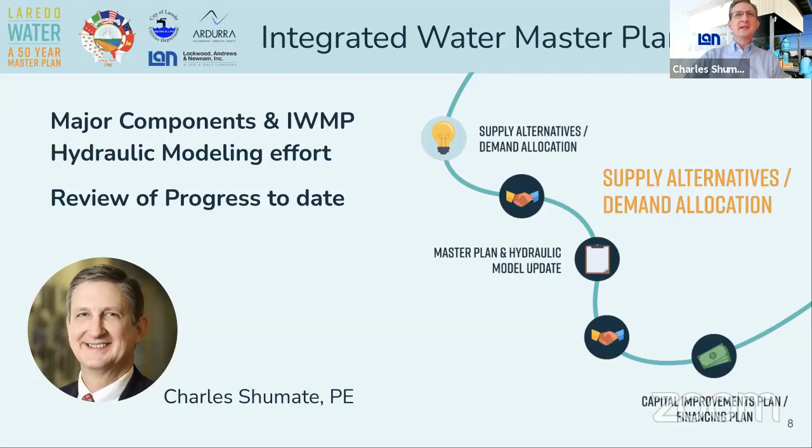The goals of a master plan are really about planning for future growth. It also has some focus on current needs and potential projects, but it's really looking forward over a 50-year planning horizon. Of course, we're always attentive to building on previous work and coordinating our efforts with city staff who know the system and potential projects best.

We want to look at all aspects or facets of the system and supply, identify vulnerabilities, and look at what happens with potential emergencies or outages. Any potential project comes with costs, so we have to look at the financing, how you fund those things, and the potential impacts. We want to end up with a plan that really represents the community and needs of Laredo, and work with the people to address all of those things.

A little bit of background: Laredo has a long history, and the water system starts almost 140 years ago. Almost exclusively, the water used comes from the Rio Grande River. Groundwater or water from wells gets pretty limited use, both due to its limited quantity and quality. Some of the previous effort we're building on is the previous master plan work done in 2011, with a major update in 2015.

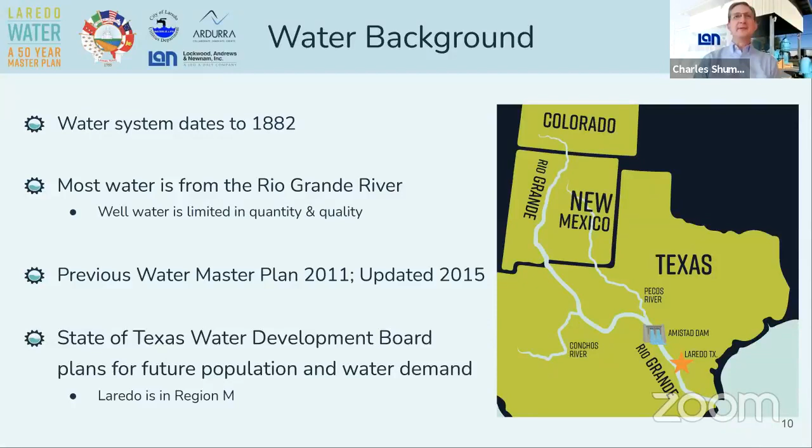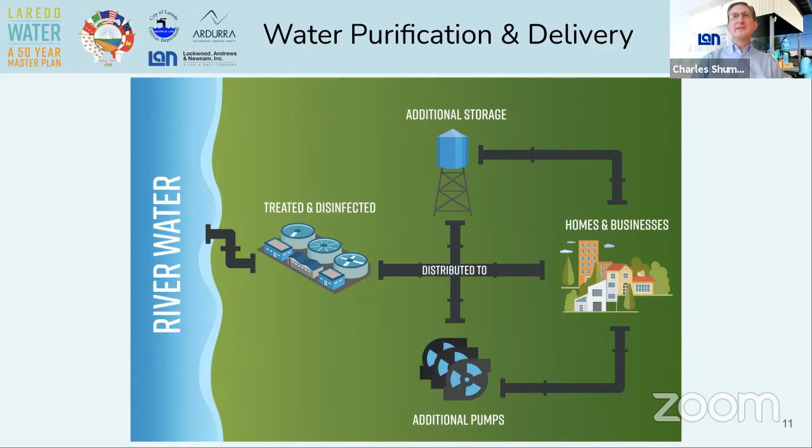At a very high level, here's a simplified view of the primary parts of any water system. You've got your source or supply, either surface water or groundwater. You go through some treatment and disinfection out into the system, where there may be additional pumps or booster pump stations and additional storage out in the system before it arrives at your homes and businesses.

Today in the City of Laredo, these numbers have changed in recent years because of bringing into the system and beginning operation of a second surface water treatment plant. That's the top left aerial photograph, the El Pico treatment plant, placed in service in the last few years. There are currently 8 booster stations, and that number is changing too because with the introduction of additional treatment capacity, the city is able to take out of current service some old booster pump stations and supply those areas directly with treated surface water. There are 9 elevated tanks in the system. Those 2 surface water treatment plants and 8 booster pump stations give you 10 service areas.

Part of the way those service areas are defined is through some pressure reducing valves in the system and isolation valves, just to control boundaries on some of those service areas. And finally, there are more than 1,000 miles of water line in the system, from small 2-inch lines all the way up to large 60-inch transmission mains.

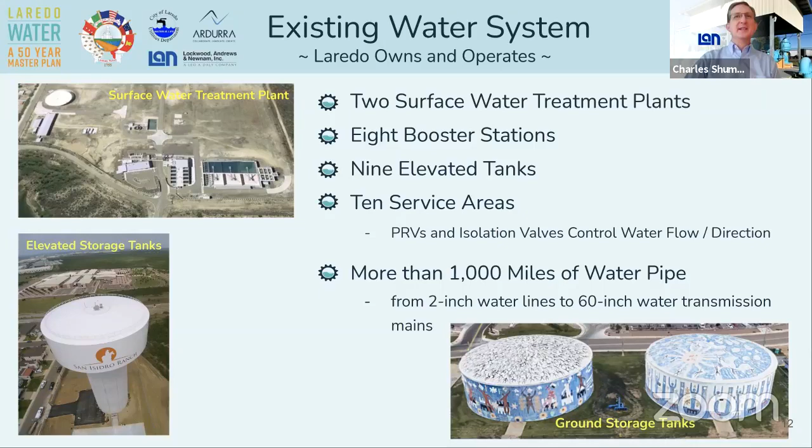So, where I'm most involved in the master planning effort is with the hydraulic modeling aspect of things. A hydraulic model really is a computer simulation or representation of the water system. It incorporates both those things above ground that you see, like storage tanks or pump stations, as well as all that underground piping that you don't see.

It's a tool that allows us to play what-if, looking at different interruptions potentially or disruptions to supply or pumping in the system, as well as to address where those may be short and more may be needed. It allows you to virtually test those improvements, identify multiple alternatives, and compare them based on some priority and way of ranking those things to see which comes out on top.

And of course, cost is always a consideration in those things, but you can look at placing storage at different locations in the system where it may be needed. The model helps you size and determine how much storage may be needed. Same applies to pumps and water lines when you're trying to connect sources of supply to especially growing areas of the system and where there will be new demand in the future.

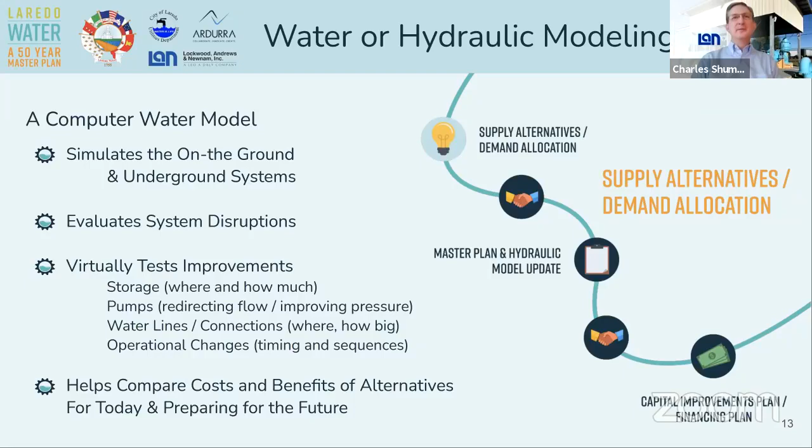And then to test operational changes. Finally, have to address with all those potential improvements, the costs and how those things measure up when you look at their costs and benefits. And it's all about being as prepared as we can be today for what the system needs to be able to deliver in the future.

So a little bit of where we started and where we've been. As I mentioned, where we began work was an update of some work performed in 2015. It's taken some fairly significant updates in some areas just because there's been a lot of growth, so there's a lot of new customers with their demands, a lot of new pipe added to the model. And of course, in that 5 to 6 year period, the cities had to address some pumps and added new pumps or increased pump capacity in a few areas.

A really important step in the modeling process is simply verifying that model, comparing it against SCADA data stored about system operation to make sure that the model results actually match what you see in the system. That looks primarily at large flows in the system from the treatment plants and booster stations, looking at tank levels throughout the system, and then pressures out in the distribution area. A big key to getting those things to match a lot of times is simply pump controls, knowing which pumps are running and when they come on and turn off in response to what other events are happening in the system.

A lot of what we've seen now is you take that verified model and apply it to the existing system first, and then look out at future conditions. And of course, what we see is things that staff talk with us about: growth and challenges in South Laredo with demand, refilling storage that's out in the system. We want to look too at where we may be able to improve efficiency of operation, and at times we're able to find ways of operating that simplify things for the operators and make them more effective across the system that they have to maintain.

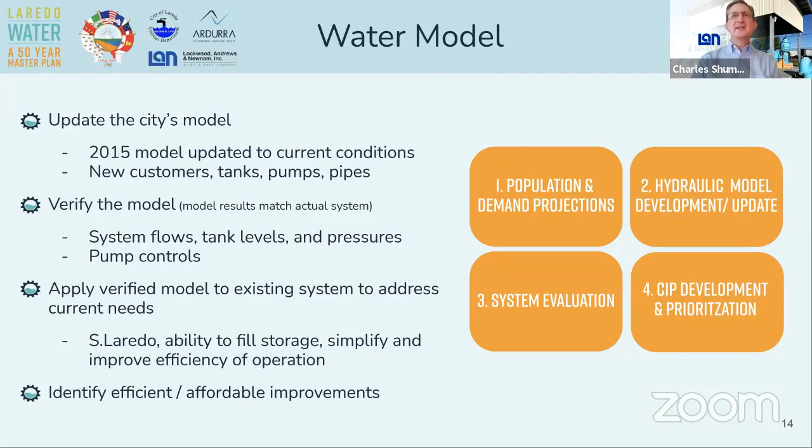So in the end, when we finished our modeling work, that report's going to document the development of that model. It's going to talk about those existing needs in terms of capacity and pressure, and capacity there is a pretty broad term that can be everything from supply capacity to treatment capacity to storage capacity to pump and other conveyance or water line capacity out in the system.

It's going to identify those capital improvements, both short term and long term. So the approach is to look at 10-year increments or intervals over that 50-year planning horizon, and to develop planning level costs for each of those projects, so that the financial planners can look at those numbers. They may have us reprioritize some things, but get those scheduled out in future years for city staff to go and then implement. And then so that plan needs to be dynamic and updatable and actionable. They need to be able to work with the projects described there and go out and implement those.

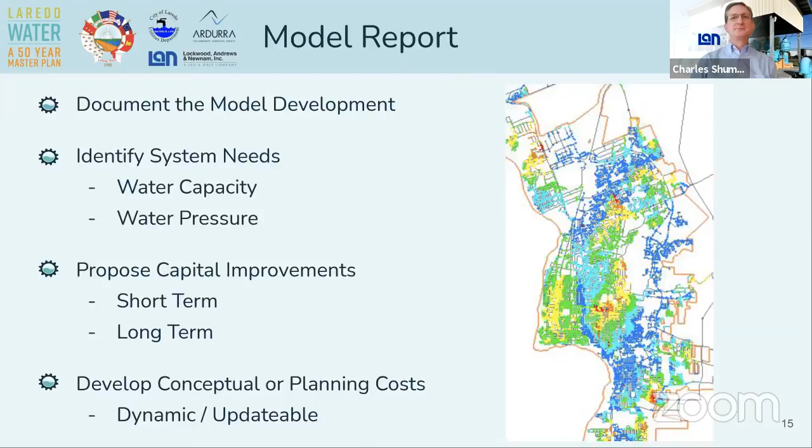A little highlight, some preliminary findings. The big one that stands out is the need, long-term, for what we've referred to as an outer loop. It's an extension of transmission mains that have already...

The early or first segments of them have already been placed and are in service from the El Pico treatment plant. So it continues to extend that El Pico plant supply to other areas of the system, through large transmission lines.

Running around the east side of the city and eventually all the way to South Laredo. Looking at some other water plant improvements potentially that help ensure, increase that level of service or the pressures out in the system.

Starting at the treatment plants and booster pump stations, just making sure there are no obstacles, no impediments to delivering water at the pressure that's needed.

And then pump station improvements, a lot of this in my mind is operational. It's making sure that there are controls in place.

Some of that's physical, some of that may be SCADA and programming, automating some things, to make sure that water is delivered in the quantities necessary at booster pump stations to then send it out to customers in the system. Next slide.

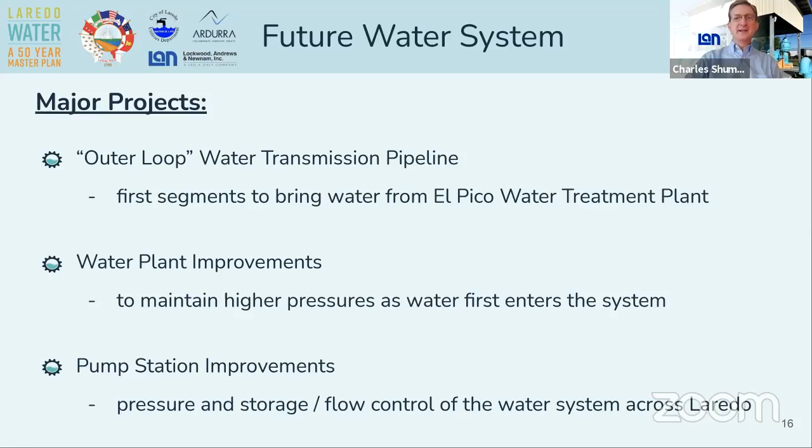This is where I hand it back to Tom, who's going to talk about population, water demands, and a number of supply alternatives that the team is looking at.

All right, Charles, thank you very much. I'm Tom Ray. I appreciate all of you being here. As Arturo said, your attendance is appreciated. Your input is needed, and hopefully we'll be able to answer all your questions later on in this presentation.

I need to start with recognizing an oversight I made in not recognizing Tom Mountz. He is a key part of our team. He's very familiar and has done a number of projects here in the Laredo area.

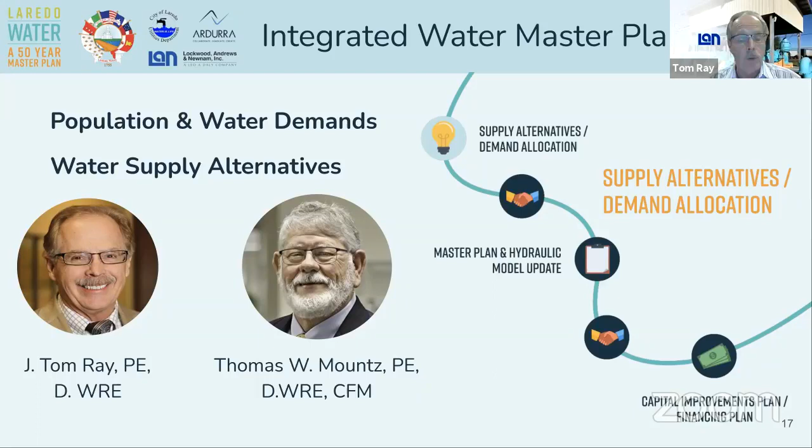Tom is going to help me as we talk through a couple of things: population and water demands, as well as what are the alternatives out there for meeting our future needs in Laredo for water supply.

So, next slide. We have some information that we followed and used in identifying how much water is needed and where it's needed, that type of thing. Key among those is one we've mentioned earlier.

That's the Region M water supply plan. The assistant city manager serves on that planning group and has had significant input.

So the city of Laredo is very well represented on Region M, and the output, the population projections and water demands, are very reliable as a result of that type of input.

We also have a number of water supply sources that have been looked at over the years for Laredo, and so we have those reports, we've looked at those.

The projected water demands we pull out of Region M help us identify two things, and we'll be trying to clarify these later on as well: setting the supplemental water supply goal and the emergency water supply goal.

The supplemental is the amount of additional water supply the city of Laredo will need to meet its future growth, and we'll show in just a minute that Laredo is growing significantly.

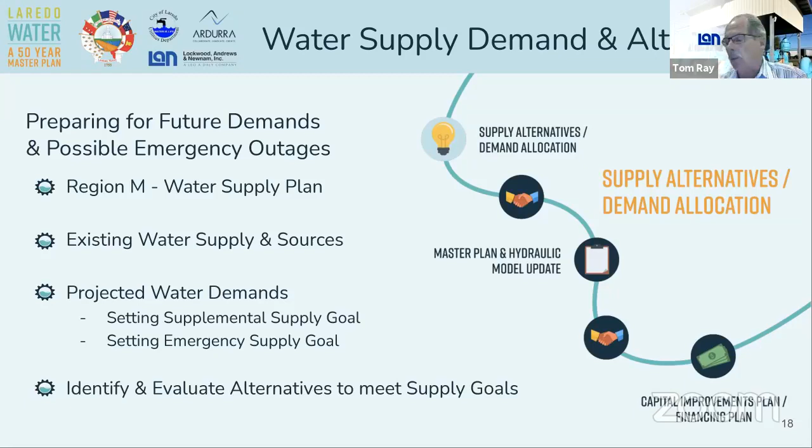We have identified a number of alternatives to help meet both of these supply goals, and we're going to run through those with you right now. Next slide.

Next slide. To show what that growth means in terms of the amount of water supply needed to provide for the growth, that's what is shown on this table.

It's taken out of that Region M plan. It's pretty busy, but I think we can walk through it and kind of show you exactly where we are today.

And where we need to be by the year 2070. Right now, the current water demand for the city of Laredo, that is that top line.

There we go, 42,000 acre feet. Actually, if you add in the Webb County irrigation and the other mining demands, it comes out to 43,851 acre feet per year. And we're gonna explain to you how much water that is.

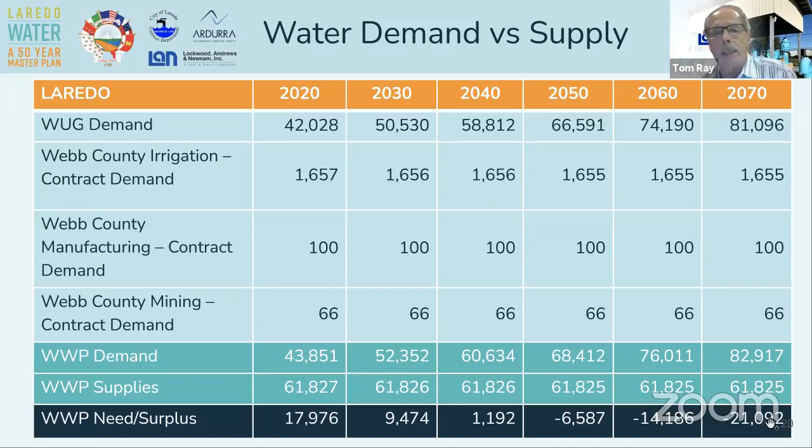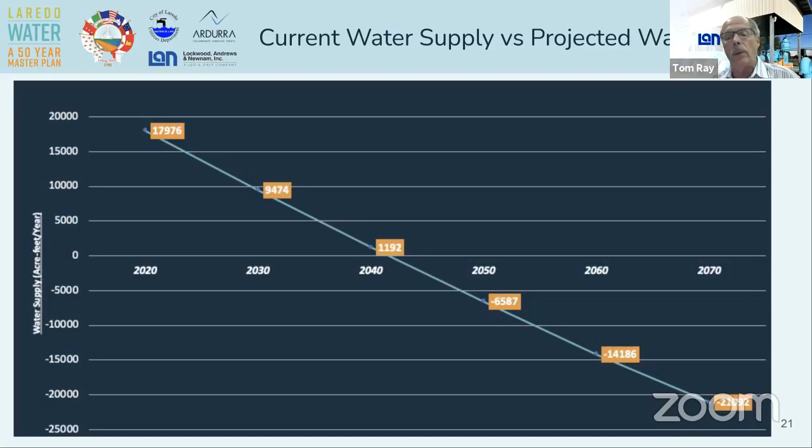Next slide, please. This is a graphic that shows what I'm talking about better than I can talk about it, but it shows where we are today, having the city's surplus amount of 18,000 acre feet. Over time, over the next 20 years, that's going to be used by the growth in the city. And just after the year 2040, we reach zero. At that point, the city will need to have online supplemental supplies to last out to 2070. That's another 20,000 to 21,000 acre feet.

Again, just to emphasize the two supply goals that we're looking at: the emergency water supply goal in case of an interruption of the Rio Grande supply, and the supplemental supply goal that we just looked at on that graph, that 22,000 acre feet that's needed to meet future demands all the way out to the year 2070.

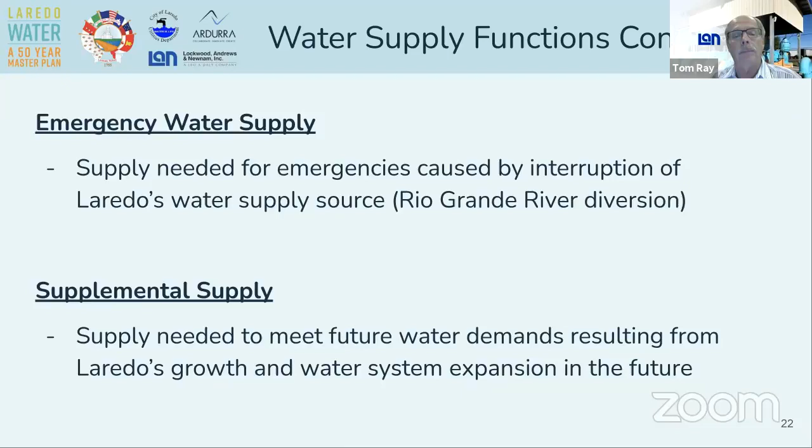All right, you've probably been confused enough about what an acre foot looks like or what it is, but this slide that Gene and his team put together is excellent. Over here on the right, it shows you that 1 acre foot of water is 326,000 gallons. So it's a large amount of water, 1 foot over 1 acre of area. So the current supply, again, that's 61,800 of those acre feet that's available today, that's going to last the city out to 2040 based on Region M projections.

So Laredo is preparing for and has prepared for future growth. And now this water master plan is going to look at water supplies, not only for the long-term future, but also for any sort of emergency outage that could happen on the Rio Grande. All right, next slide, please.

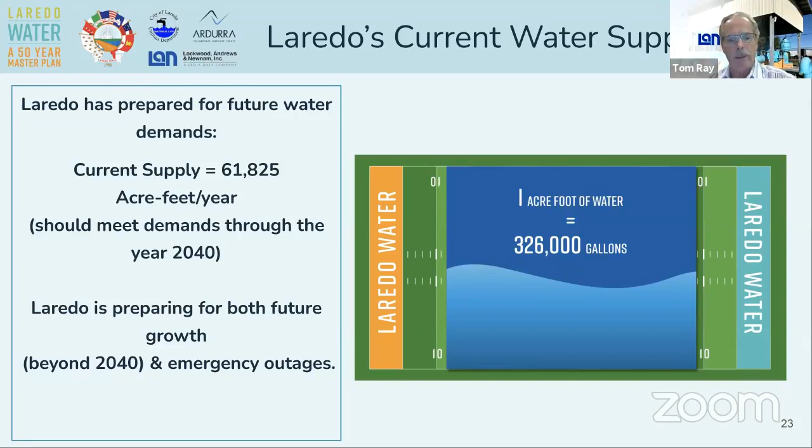Again, this is showing our targets and actually putting numbers on those, because in a few minutes we'll look at the different alternatives. The test will be: will that water supply alternative meet, 1, the supplemental water supply goal, and 2, the emergency water supply goal. The supplemental, again, is 22,000 acre feet. If we take that to another unit, million gallons per day, that's used by city utilities and others when we talk about capacity of treatment and the need for treatment supply. It's usually referred to in million gallons per day. So 22,000 acre feet is 20 million gallons a day.

The emergency water supply amount that we have identified, and we're going to verify this further with the city, with Arturo and his staff, is 37,500 acre feet, and that's 33.5 MGD to have available, again, if there's an emergency, an outage of the Rio Grande supply.

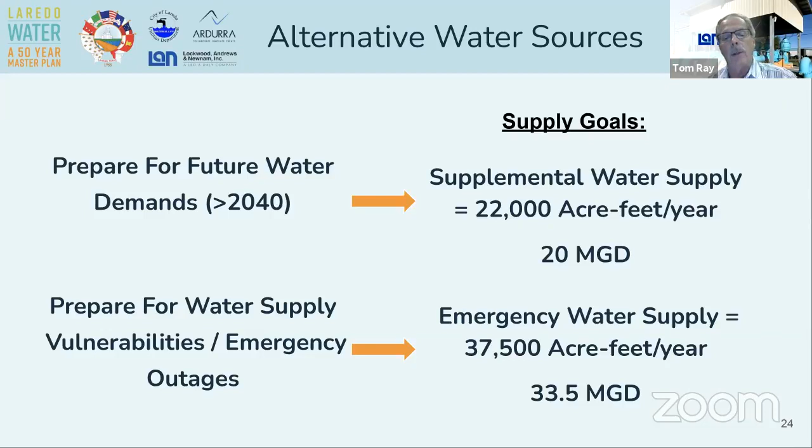Another technique of stretching water supply, if you will, is to use aquifer storage and recovery, and I'll talk about that, try to explain that a little more. And the backbone of the Laredo water system continues to be the Rio Grande. So there continues to be the need to identify additional water rights that could be obtained from the Rio Grande. Next slide.

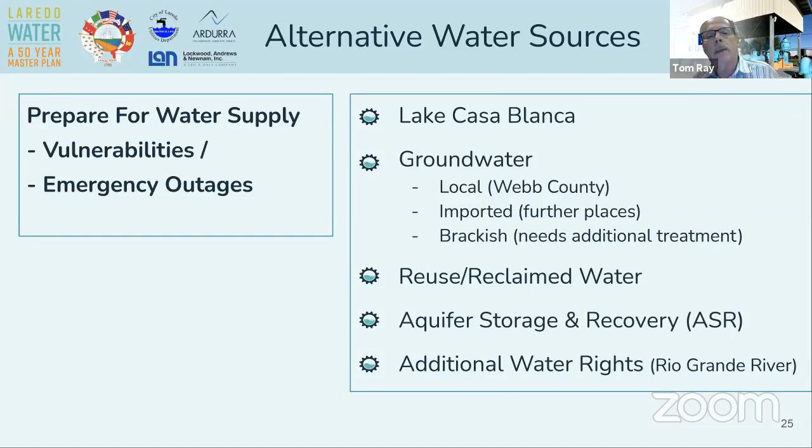All right, this is where I would like Tom to jump in here. Tom has done a lot of work on Lake Casa Blanca, and he can go through the use of Lake Casa Blanca to potentially meet these supply needs. Tom? Thank you, Tom. It's good to be here this evening.

I want to talk just a few minutes about Lake Casa Blanca and the potential for its use for supplemental and emergency supply. It's always been looked at as a body of water immediately adjacent to the city, and so it has always been considered a potential source for additional water.

With this study for the master plan, we re-looked at previous attempts to quantify the lake, and we prepared a memo about the capacities. It could be used, as has been thought over the years, for direct emergency supply. We found that though to be very, very limited. It also has some potential for limited indirect reuse storage.

When Tom comes back and talks about reuse in a few minutes, some of that could be temporarily stored in the lake. There seems to be some capacity for that.

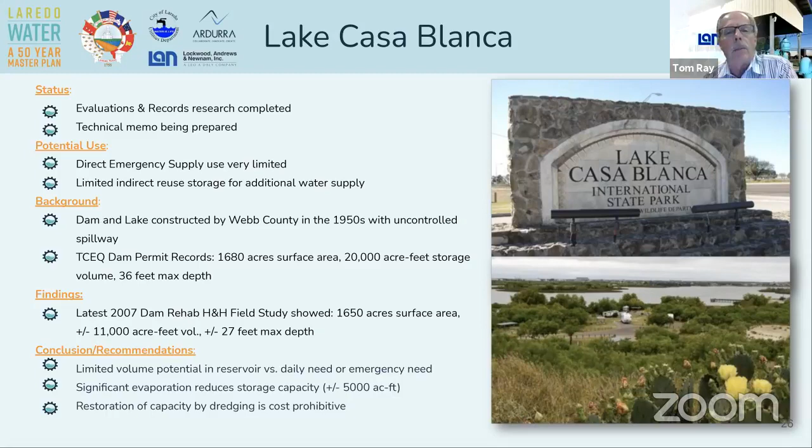All right, let's see. We may have a couple more slides on Lake Casa Blanca. Yeah, this. Oh, okay, no. Here we go. No, I take that back.

We've gone through the Casa Blanca slides and are now going to look at one of the groundwater supply alternatives, and that's in North Webb County.

Initially, we have completed some initial evaluations. We put together a draft document. We'll be going over that with the city.

This supply source is generally in the northern Webb County area, up close to Dimmit County. The distance from Laredo is about 40 miles. As the crow flies, it would probably take about 47 miles of conveyance pipeline.

Supplies are being estimated, and on the phone with us, joining us, is Mike Thornhill. Mike is our consultant with regard to groundwater. He's a groundwater hydrologist with the Thornhill Group. I've worked with Mike for years, and he's very familiar with these groundwater sources.

He has provided us information regarding what the potential supply from this North Webb County area could be, and it looks like about 25,000 acre feet per year. That does meet the supplemental supply goal. That's just over 22 million gallons a day.

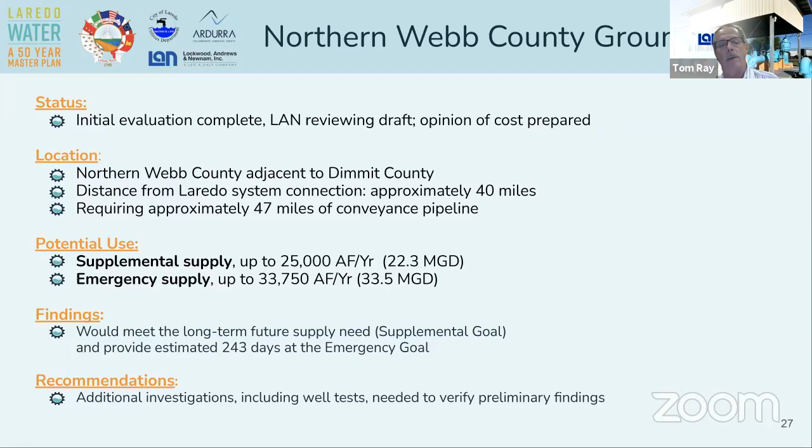Brackish groundwater is another one. Again, Mike Thornhill helped us with this one. There have been a number of zones identified by the Texas Water Development Board and others of brackish supplies in Webb County. The distance varies, the cost is high, and the water quality is

slightly saline to moderately saline. Treatment would be required. The value of this brackish supply is that it's in close proximity to the city's water system. However, the downside is it doesn't meet the goals—it's limited in quality and has limited quantity as well. So it's not sufficient to meet either of the goals.

All right. Mike, did you have anything to say on either one of those? I don't want to.

Again, I apologize, I'm still out in Wink, and I'm not much to look at anyway, so I'll just leave the camera off. But with the northern Webb County Carrizo, the preliminary indications are that it's pretty good quality, but the TDS is in the 800 plus range. There's more Carrizo below it that would be probably slightly above 1,000, so there could be some strategies there for blending, in terms of the longer term.

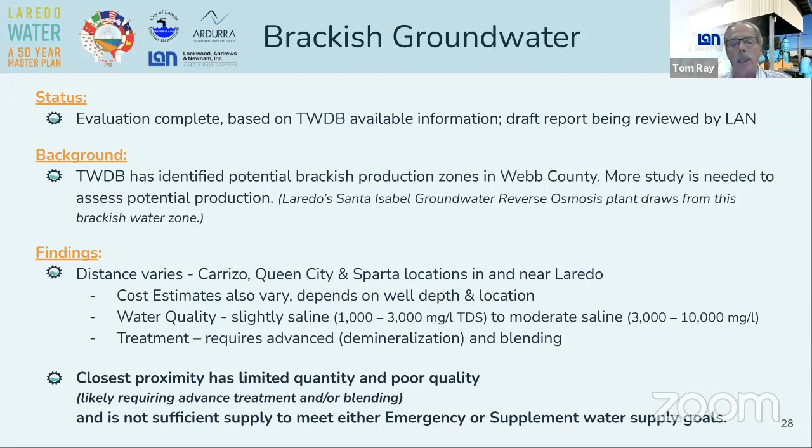All right, let's move on to the next slide.

Another report was done that we relied on, a very thorough report looking at what is called ASR, Aquifer Storage and Recovery. This technique has been used, came into vogue probably 30 or more years ago, but where it's applicable, where you can do it, it allows you to take a portion of your treated water from your water treatment plant and store it essentially in an underground aquifer. Then during the heavy use times of the year, typically summertime, you could pull it out of that underground storage and use it during those periods of time.

What was found by the technical report in 1996 was that the aquifers in the city area are shallow, and importantly, when you inject the treated water, the recovery rates provide low production. So you get into a situation where it's going to be more costly than the production that's made available from the storage. Also importantly, the Region M group took a look, but there are no recommendations in the current Region M plan for aquifer storage and recovery.

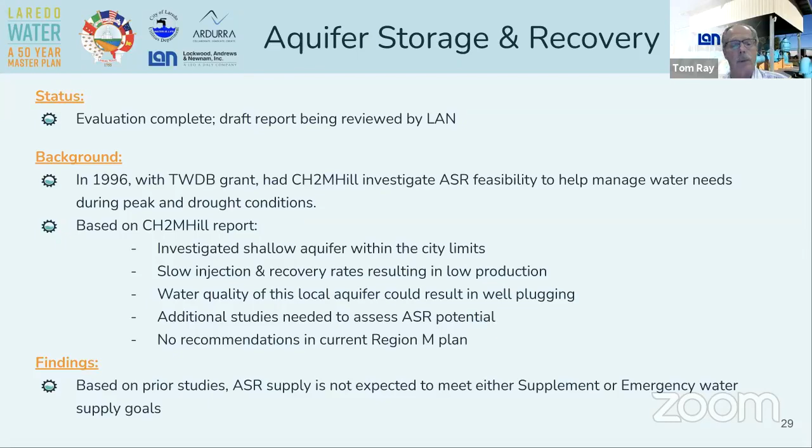All right, next slide, please.

Mike can help me with this one too, because we're going to talk about imported groundwater. These are supplies that are outside of the Webb County area, moving up into Dimmit County, all the way up to Val Verde and Kinney County. Here's an excellent map that Mike and his group put together to show where these supplies are located.

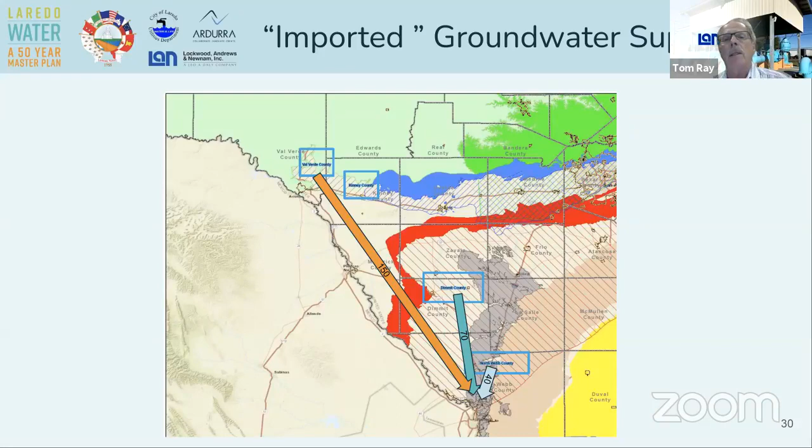Keeping that map in mind, if we look at Dimmit County, adjacent to Webb County, it has a significant supply source, 40 million gallons a day. It's 70 miles from the city system, the water quality is good, and no blending would be required.

If you move a significant distance, doubling it to the Kinney County area, there's about 22 million gallons a day of fresh groundwater available, but it's also adjacent to Val Verde County. Mike Thornhill is advising that if you look at Kinney County, you'd want to look at Val Verde in conjunction with that, combine those, and you have a very significant supply, because the Val Verde groundwater supply is 40 to 90 million gallons a day on its own. The downside is that's 150 miles away, but it is fresh groundwater, no blending would be required.

Mike, any comments on imported groundwater? Any points I missed? Certainly any issues with groundwater conservation districts would need to be addressed, and the joint planning process of what are called groundwater management areas would need to be addressed in terms of availability of water.

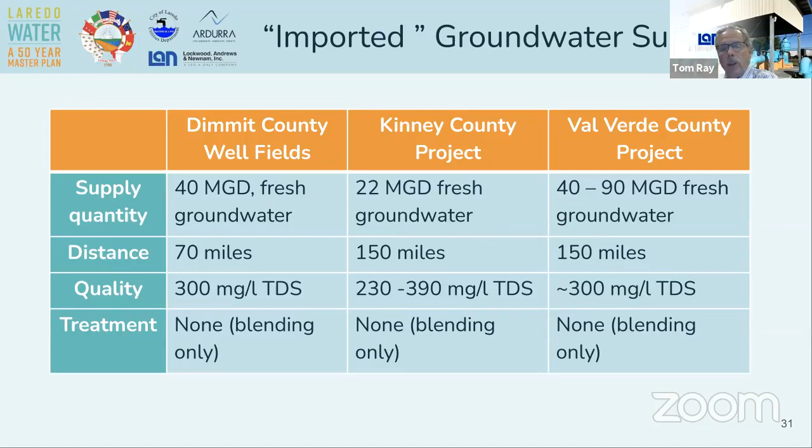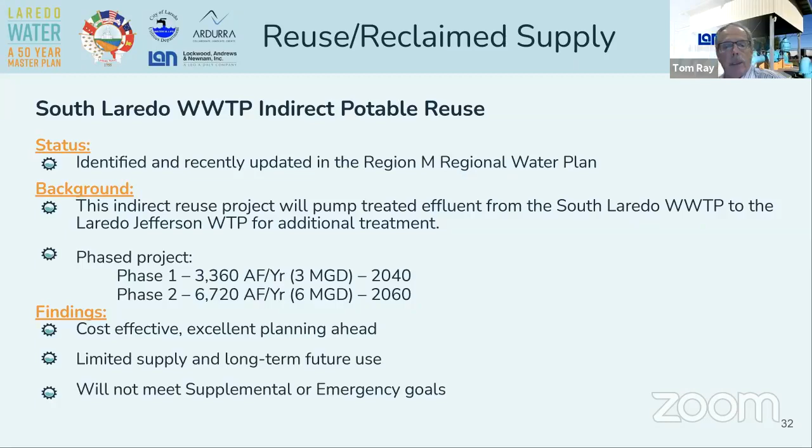We also had Kirk Kennedy, who's very familiar with the Rio Grande, look at additional water supply, surface water from water rights that could be made available in the Rio Grande. Kirk Kennedy did not find any additional surface water supplies that would be readily available on the Rio Grande in terms of tributaries or that type of thing.

So based on our initial discussions, and this will be in the report, additional surface water development in the Rio Grande is expected to be limited, but the acquisition of future water rights is a recommendation that the city is currently following and should continue to follow.

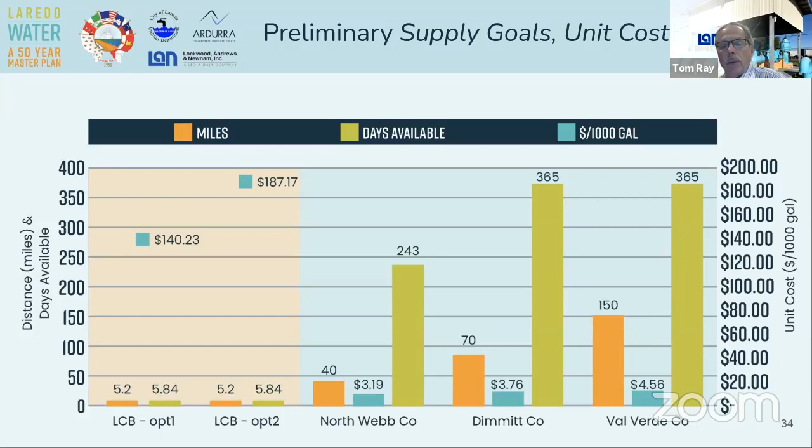Looking at the groundwater projects we just went through, the first bars are the distance from the city system. The next bar gives an indication of what it would cost to use supplies from that source at the 33.5 MGD goal. You see those cost numbers fairly consistent for Wave and Dimmit County. Val Verde County, you go out 150 miles, so you add some significant cost. One other factor the city would be considering is that North Webb County could provide the emergency supply goal for 243 days, as mentioned earlier, but the Dimmitt and Val Verde County projects would be year-round able to provide the emergency supply goal for the city.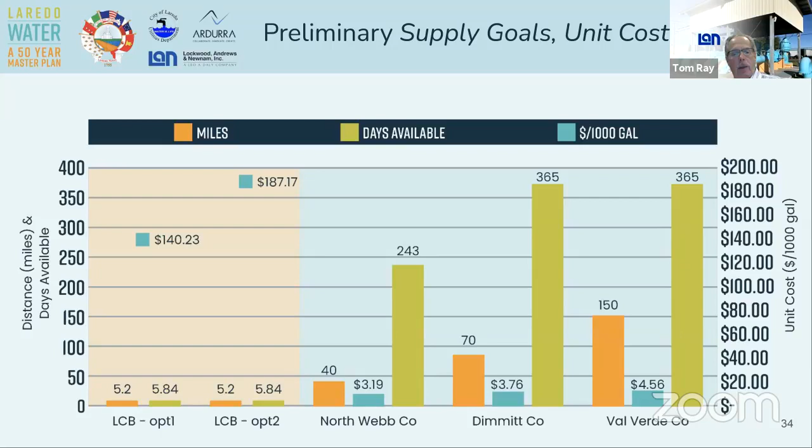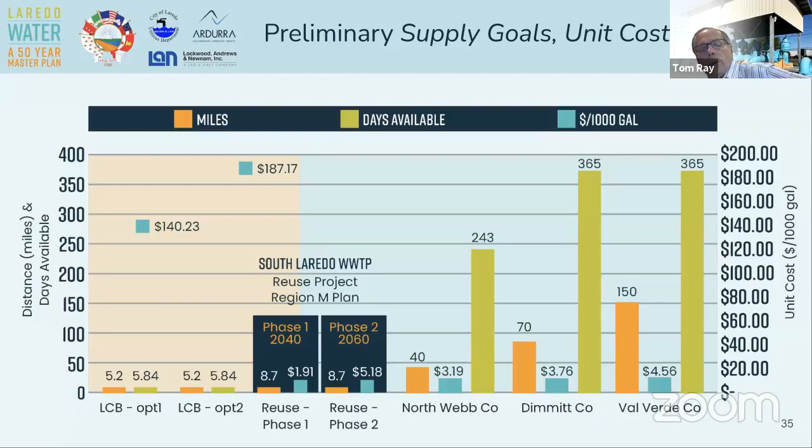Next slide. This slide is the same, except I've inserted the South Laredo reuse project, to give you an idea of the phase 1 cost. It's close to the system — that's the 8.7 miles of piping that would be needed. But the cost, particularly that first phase cost, is very low at just under $2 a thousand. Then the phase 2 cost is just over $5 a thousand.

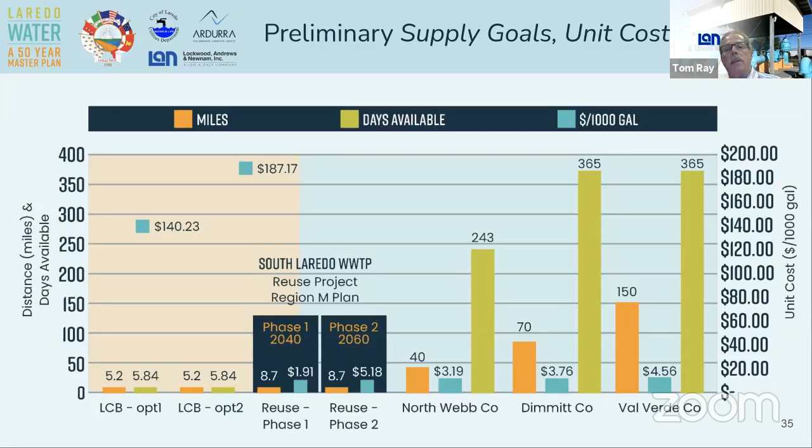So that gives you a perspective of supply amount, the ability to meet the emergency goal in terms of number of days, and then an estimate of unit cost for doing that. Those will be discussed in more detail in the report that will be provided to the city.

We'll be working with the city probably next week, going through these and confirming that the weighting factors and the outcomes of the criteria rankings are good, reliable, sound, and reasonable. Again, this will help us identify for the city the alternatives that make the most sense in terms of meeting both the supplemental water supply goal and the emergency supply goal.

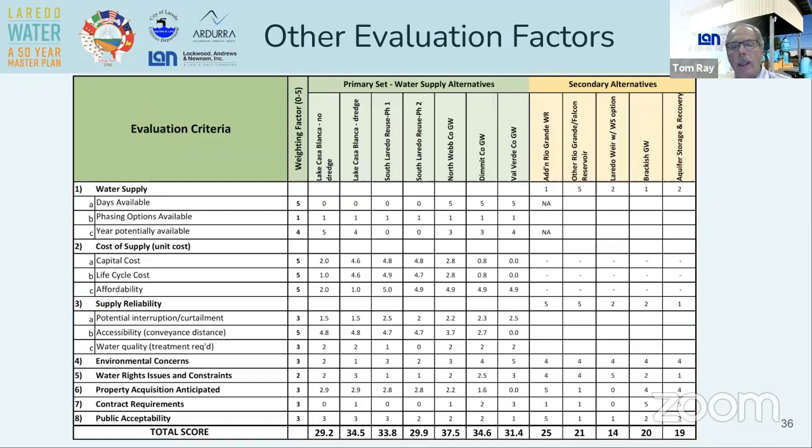Great, thank you Tom and everyone for sharing all that great and detailed information about the City of Laredo system and what we're looking at for the future. Again, the Laredo Utility Department has been developing and implementing projects for many, many years, replacing old infrastructure and bringing water and wastewater service to new development.

The next part of the project we're working on now is prioritizing and scheduling all of these projects, to sort through the projects that are already known, to look at new projects that are being anticipated, to imagine future needs using that water model, and also looking at future water supply sources and emergency sources.

I'll be assigning a deadline and a cost for every project, judging the impacts and the benefits of the projects against the costs, so that we can pick the best projects for the best price and lay out a plan for the next 20 years.

That's really important because we want to be able to pursue all of the financing options we have—loans, grants, and partnerships. We want to keep improving the system today and prepare for the system we'll need as we grow. Next slide, please.

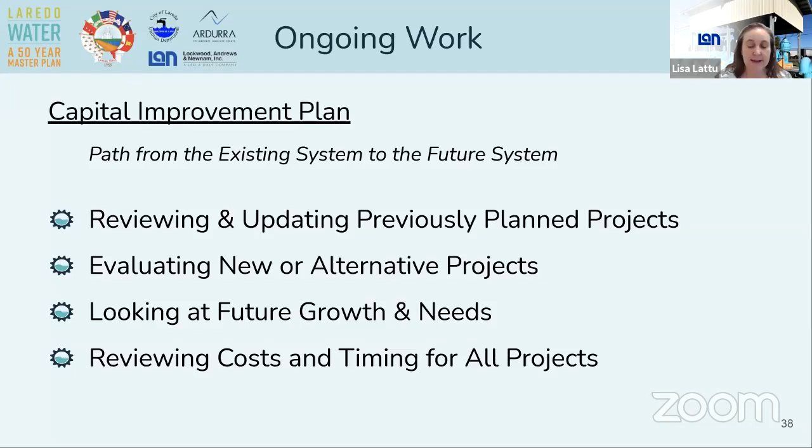The next slide shows a little bit of the dollars we're looking at already, and this is just 5 years' worth of projects that are already planned—almost $126 million of total investment, split about $69 million for supply and treatment of the water, and $57 million for moving it around from place to place within the city.

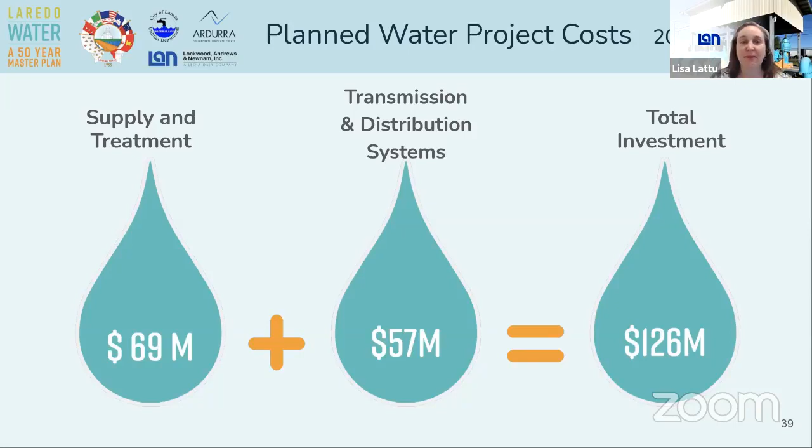The next slide shows some of the projects that we already know about or are thinking about, and hopefully there's one that you recognize from your neighborhood. Of course, the El Pico treatment plant, the Lyon Street booster station, which I think maybe has started work already, some repair and replacement lines particularly downtown, and the project that Charles was talking about—an outer loop project to help bring water around the city to some of the new development.

And then a lot of the local or neighborhood plants always need work—so Cuatro Vientos, Northwest, I think the water tower there is called La Bota, in the East Corridor area, the Del Mar area, and the airport area. Those are some of the ones that we have identified already.

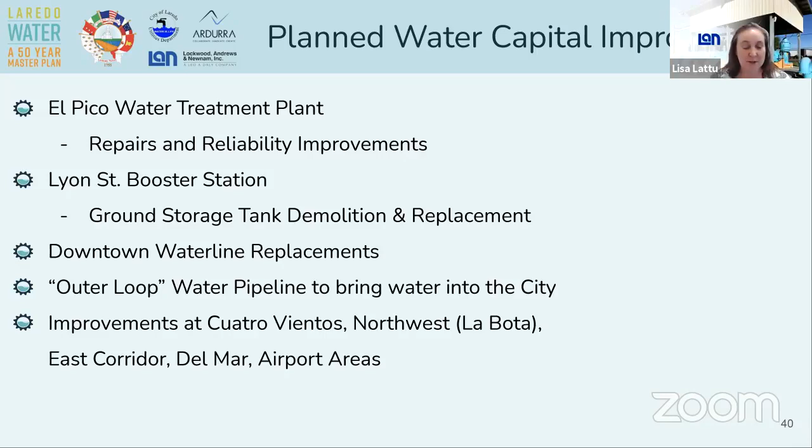Thanks, Lisa. About this time, at a real town hall, a live one, we would stretch our legs and take a potty break. This being the Super Bowl, we'd have some great commercials for you. But what we're going to do now is just roll right into the wastewater side.

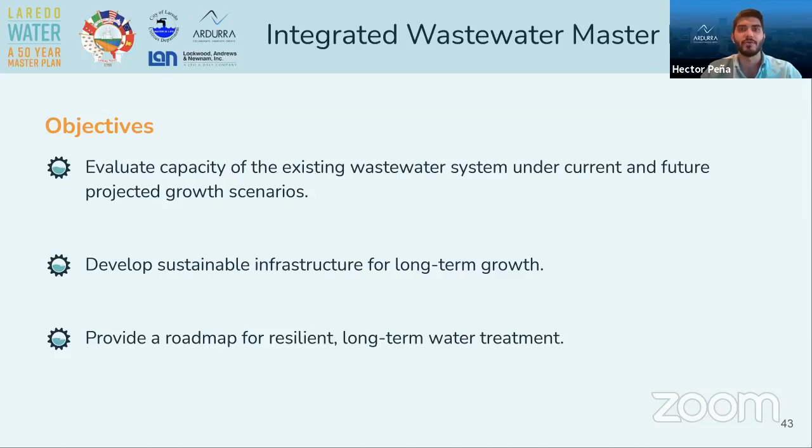So just as a background of the wastewater collection process, here's a graphic that shows what happens after homes and businesses flush. The water exits homes and businesses from the drains and toilets, and where that goes. If you look at the middle of the screen, you've got homes and businesses shown here, and then the wastewater collection system represented here with the green pipes.

The collection system consists of gravity and force main pipes, manholes, and lift stations, which are represented here by those pumps labeled as lift station. Then the collection system sends the dirty water into the wastewater treatment plants to be treated, and after treatment, the water can be either safely released back into the river, or as shown here with the purple pipe, it can be reused as non-potable water.

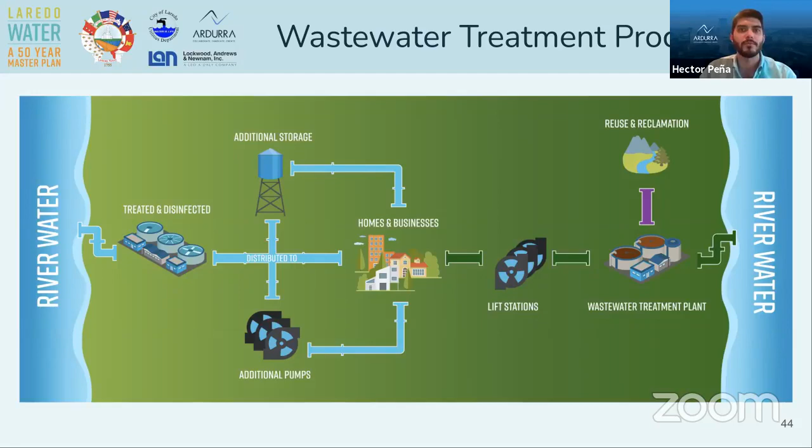So, next slide. On the right side of the screen, we have a map showing the city's actual wastewater system. The city's collection system is made up of approximately 900 miles of sewer lines. Most of these sewer lines are gravity lines, but there are also some force mains.

So the gravity lines are shown here in green. There's also force mains, also shown, but it's a bit harder to see because there are significantly fewer force mains, but they're shown here in red.

And to help visualize the amount of pipe, if the map doesn't do that already with all these green lines, if we were to line up the 900 miles of pipes that make up the collection system, it would be equivalent to the distance from Laredo to Kansas City, Missouri. Just throwing that fact out there to put in perspective how complex the system is and how much pipe the city constantly maintains that we may not be aware of in order to keep the system functioning.

So this 900 miles of pipe ranges in sizes all the way from 4 inches to 54 inches. Again, they collect the wastewater from every single home and business in the city. Then the wastewater travels mostly downhill by gravity until, as shown in this graphic, it reaches a low point in the system where a lift station has to be installed in order to pump or lift the wastewater so that it can continue flowing downhill, so it can make its way into one of the wastewater treatment plants.

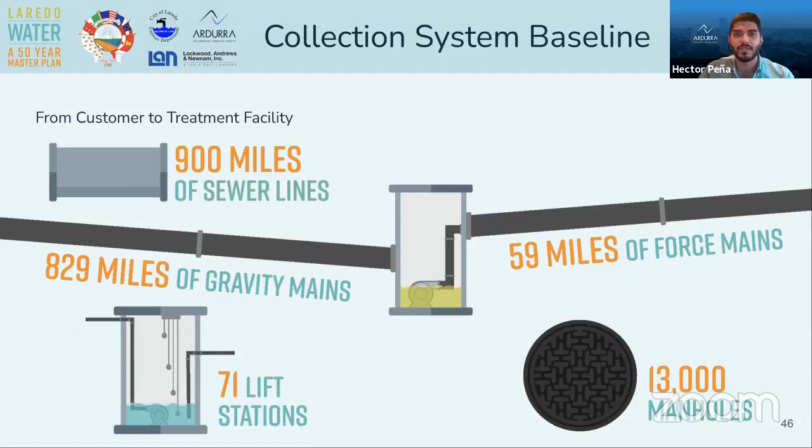And finally, there are 6 wastewater treatment plants that the city owns and operates. If we went a couple of slides back, we looked at the map on the right, we'll see that they're right there, circled in blue.

So that's... I'm sorry, my screen turned black here, so I can't see anything. All right, I'm back. Sorry about that. Technical issues here, but anyways,

Again, those are the 6 wastewater treatment plants, and combined, these 6 water treatment plants have a capacity of 35 MGD, or 35 million gallons per day, but they actually treat an average daily flow of 19 MGD.

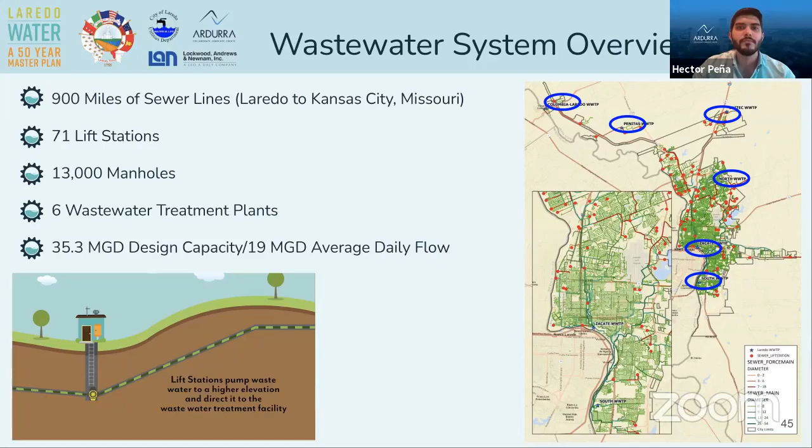So here we have a graphic that shows a typical treatment process that the city uses in most of their plants. The first component here on the left side is the influent lift station. This is where the wastewater from the collection system that I just described enters the plant and discharges into this wet well or tank that sits below ground.

From there, wastewater is pumped into the first process, which is called pre-treatment. That consists of the screening and the grit removal, shown here as the second and third processes on this graphic. Screens are there to capture and remove large objects such as wipes and plastics, and the grit removal is there to remove finer materials such as sand and gravel. So all of these solids, both the larger objects and the finer material, are removed and taken to a landfill for disposal.

So the next step in the process, shown here in green, is called the secondary or biological treatment, labeled as the aeration basin. Here, activated sludge, which are the good microorganisms, are introduced, as well as air, as you can see on the graphic here. We can see some bubbles there.

So air in the form of bubbles is pumped into it as well to feed these microorganisms, to help them reproduce, keep them alive, and eat the pollutants in order to achieve biodegradation.

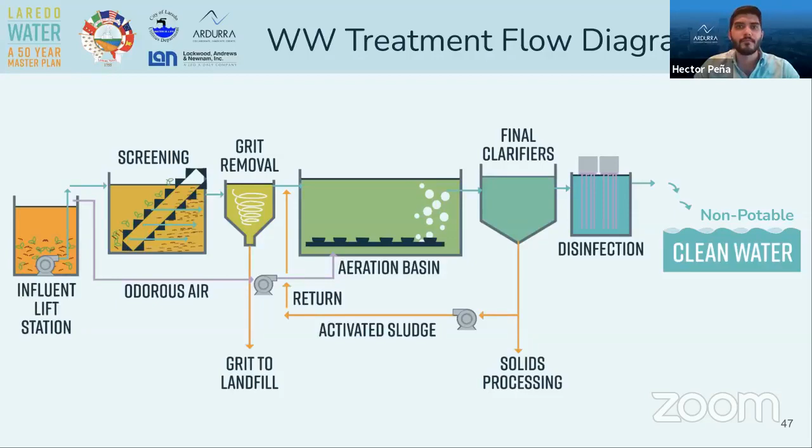So here we have aerial images of the 6 wastewater treatment plants that the city owns and operates. On the top left, we've got Zacate, which is by the International Bridge number 2. To the right, we've got South Laredo, which is behind the Santa Fe subdivision, over by Zapata Highway. And then we've got North Laredo on the right side, which is in Shiloh, close to Loop 20.

Bottom left, we've got Unitec, which is at mile marker 13, serving an industrial area. Then we've got Laredo Colombia, which also serves an industrial area by the Laredo Colombia International Bridge. And finally, on the bottom right, we've got Peñitas, which is also located on Mines Road.

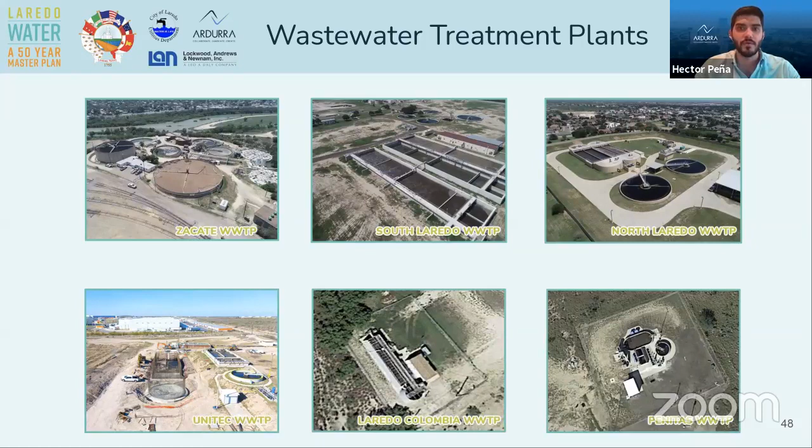All right, so earlier I talked about the combined design capacities and average flows for the 6 wastewater treatment plants. Here we have the 50-year projections to determine what capacity is going to be needed by 2070, which is a long-term scenario. On the left side of the graph for 2020, we have the current approximate population shown in blue, which is around 300,000 currently.

And then, as mentioned earlier, the average daily flow, shown here in the yellow or green color, is around 19 MGD. And then the combined capacity of 35 MGD for the 6 plants.

Then on the right side, we have long-term projections. And as LAN said earlier in their presentation, the population for the city of Laredo is estimated to be over 600,000 by 2070. So as the population increases, the wastewater that's generated will also increase, right? So it's estimated that the average daily flow into the wastewater treatment plants is going to be around 46 MGD.

So in order to figure out what the treatment capacity would be required by 2070, we look at the TCEQ rules, which state that whenever a wastewater treatment plant reaches 75% capacity for 3 straight months, then you start planning for expansion. Following that rule, we determined that we're going to need approximately 61 MGD of treatment capacity to treat those additional 26 MGD in 2070.

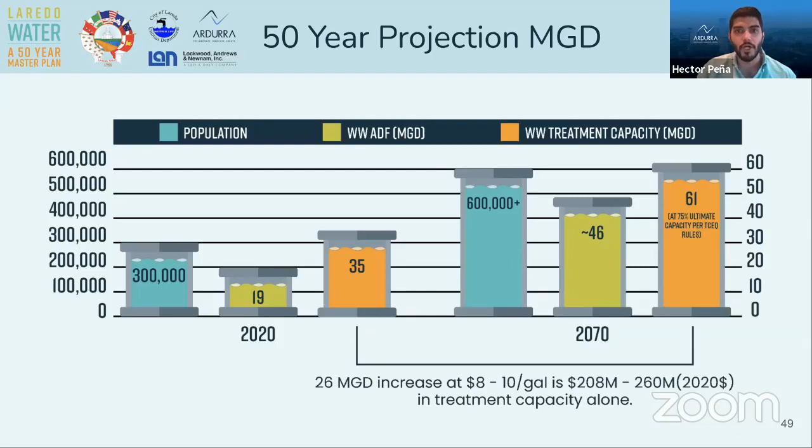Again, these are just rough numbers. We're early on in our study here for our wastewater master plan, but we'll just provide an idea of what the cost may be.

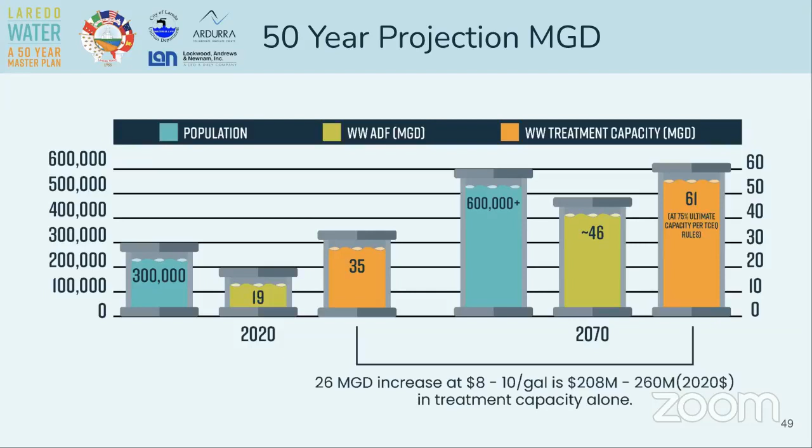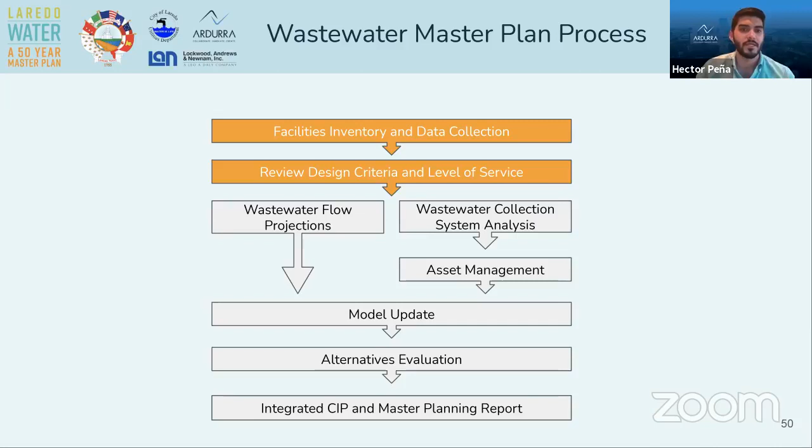Below those steps highlighted here in orange, we have a couple of steps here in parallel, which is where we currently are in the process. And Nacho Hinojosa from our Laredo office here will touch on that, as well as on the next steps of the wastewater master plan. So I'll pass it on to Ignacio.

Thank you, Hector. Quick disclaimer, if you guys see me moving around, I'm not in trouble. Nothing's happening. It's just me pretending I'm in a live town hall meeting, right? I'm still getting used to this virtual presentation, even one year in.

As Hector mentioned, I'll be going over what we're currently doing as part of the wastewater master plan. We're running two parallel tracks: the wastewater flow projections, and the wastewater collection system analysis and asset management component. In addition, I'll also touch base on the existing capital improvement plan for the wastewater system for the City of Laredo.

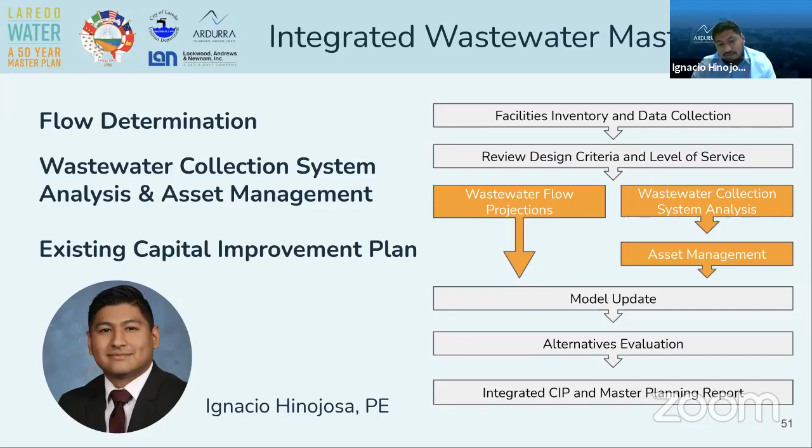For the flow determination, or flow projections, we want to accomplish three things. First, we want to set a baseline or existing flow condition - the 2020 base flows, what we flush, what we use, what drains down our faucets from our houses and businesses. Once we set that, we want to project that flow over five planning horizons: 2030, 2040, 2050, 2060, and 2070, so every decade until we reach the 50-year mark. Then we want to use those flow projections to develop a 50-year plan with alternatives and scenarios, and a capital improvement plan attached to those alternatives of how the city will build out to accommodate the expansion of the city.

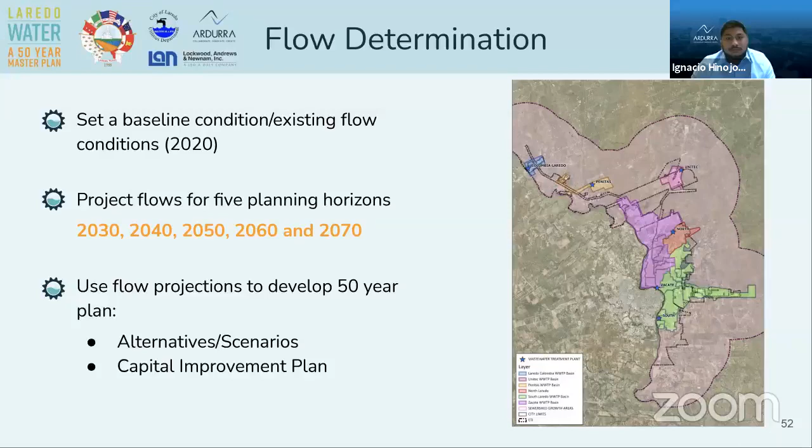As I mentioned, the first thing we accomplished was the existing flow estimation for the baseline condition. We first went in and got with the city, and identified the existing sewer sheds and subbasins. So what is a sewer shed? The sewer sheds are represented...

We have three major sewer sheds here in Laredo, represented in different colors here on the right side of your screen. The three main ones are the Zacate Creek, the North Laredo, and the South Laredo sewer sheds. And in the north of the city, sort of isolated, we have the Laredo Colombia sewer shed, the Penitas, and the Unitec Industrial Park sewer sheds.

So what does a sewer shed mean? For example, if you live in the Mines Road area and you flush your toilet or take a shower, all that wastewater will travel all the way to El Azteca, or right next to El Azteca, where the Zacate Creek wastewater treatment plant is, and then the wastewater flow will be treated there and go as effluent, clean water, into the river, the Rio Grande. Another example, if you live east of the airport or by the lakeside area, then your wastewater actually travels all the way down to the South Laredo wastewater treatment plant on South Zapata Highway. So that gives you an idea of what a sewer shed is, and the magnitude of how big they can be.

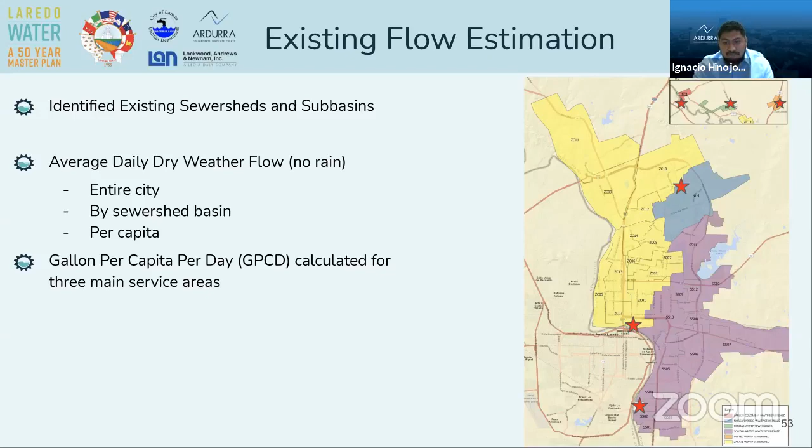Now for the flow projections, or future flows, we're currently working with our team and the city on determining these. But I'll take you through some of the considerations we'll take into account. We'll essentially use the future land use within the city limits - areas that are not developed within the city yet, but already attributed to either light manufacturing, business, residential, or multi-use. Each of those lots already has an intended use, which goes with an estimated flow. Then we'll carry that out through the ETJ.

We'll also take into account population projections from the Region M master plan, like Charles and Hector mentioned, and other planning reports like the Metropolitan Transportation Plan and major infrastructure projects the city has ongoing, like the Hachar Ruthinger Road, the Outer Loop planned for the future, and the South Laredo Sports Complex. These are catalytic projects that'll shape how the city grows and impact it.

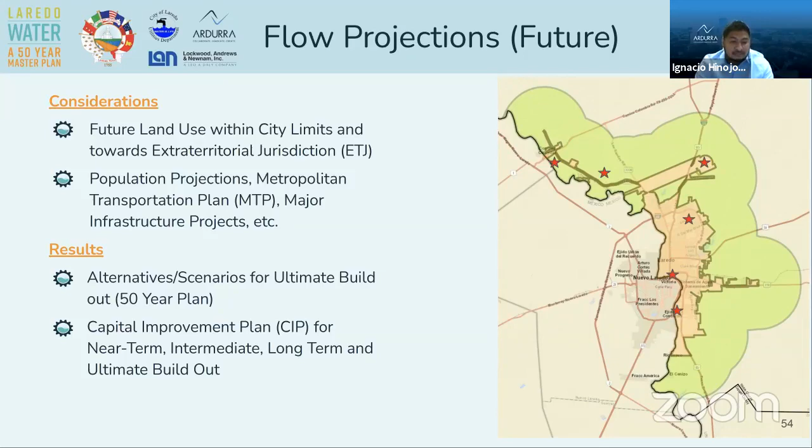The other parallel track is a wastewater collection system analysis and asset management. What we want to get out of this is to summarize the current assets and life expectancy of the wastewater system, then develop renewal costs for the current assets and use these costs to develop a long-term CIP for renewal of the system. Not future improvements, but what we're going to do with the assets we have right now - the pipe on the ground. How do we renew and have an up-to-date system?

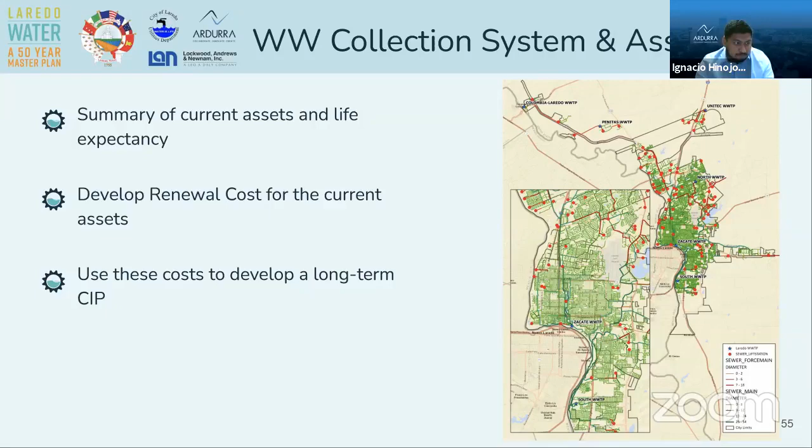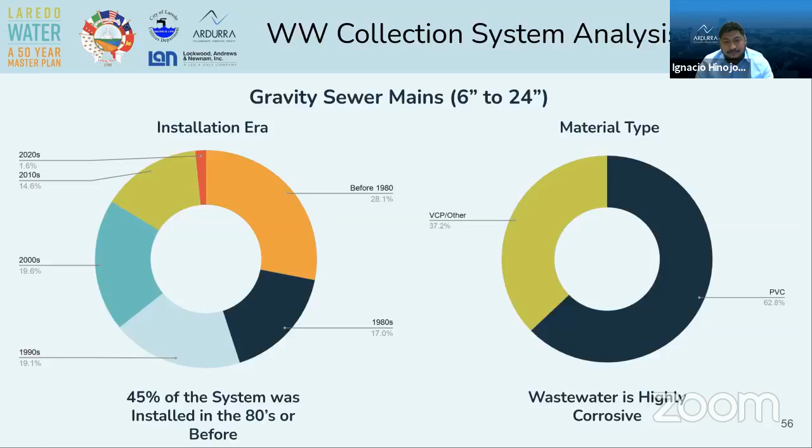Once we go through the analysis, we'll develop an asset management plan for the city, and I'll give you an example of what that will include. As Hector mentioned earlier, if we were to line up all the wastewater pipe, the 900 miles, it would take us from Laredo to Kansas City. What we found is that 30% of our collection system has a life expectancy of 10 years or less. To put things in perspective, that's like the distance from here to Austin, and that need will grow from Laredo to Waco or even beyond by 2070.

To counteract that, what we would theoretically recommend once we're done with this exercise is to implement a renewal of 1% of the system every year, so that by 2070 we have a system with a life expectancy of 10 years or more. The money attributed for renewal would no longer be needed and could be invested in other infrastructure that may be in need at that time. This is just an example of what asset management looks like and what we'd recommend to the city.

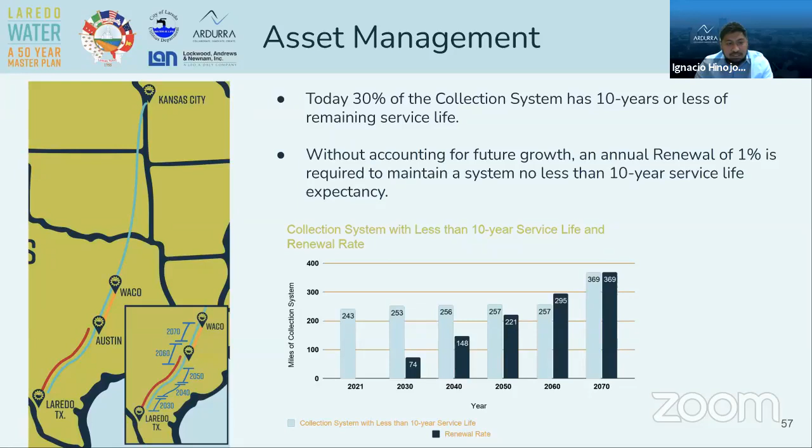On the other hand, this slide is more just to give a snapshot of what our wastewater collection system maintenance crews go through.

When they do the work orders - some of you may be familiar with work orders at your jobs, but what the crews would see on the wastewater collection system side is when we call 311 and we have odor complaints, there's a sewer pipe break next to my house, there's sewer backups, lift station is overflowing, the pumps are down.

So when that happens, there's a work order inputted into the system, and a crew has to go out there. Some work orders are as fast as 30 minutes, some take days. But for this exercise, I chose an arbitrary amount of 2 hours per work order, just to give you an idea of the time our crews spend on work orders alone, not including their daily tasks and other projects the city has ongoing.

So on a weekly basis, they spend about 53 hours per week. Monthly basis, 255 hours, and 2,900 hours per year. Again, this is an arbitrary amount - 2 hours per work order - but it paints a good picture.

Like I said in the previous town hall meeting, kudos to not only the wastewater collection system, but during the freeze we had in February, the water distribution and water treatment crews were working round the clock to reestablish services and fix, I think, 270 pipe breaks citywide to keep water flowing into our houses. Big thanks to Arturo and Mike's staff there at the utilities department for that.

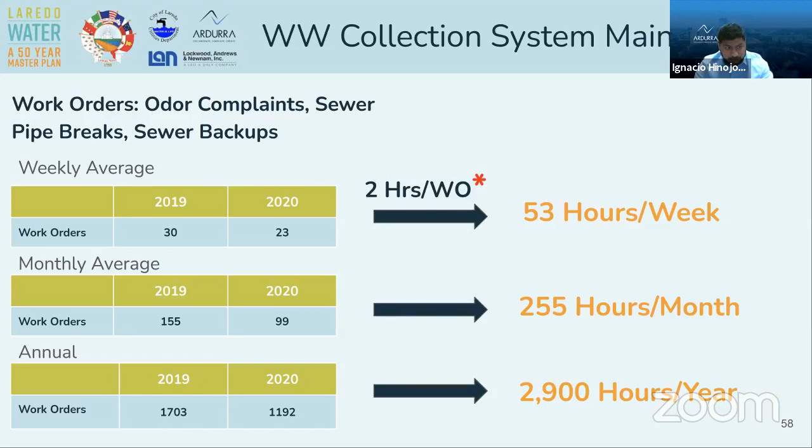So with all that said, I was going to touch base on the wastewater CIP. This is money allocated for capital improvement projects, big projects for the city of Laredo wastewater system. Currently the city has approximately $64 million allocated for wastewater treatment projects, $41 million for collection system projects, with a total investment of approximately $105 million.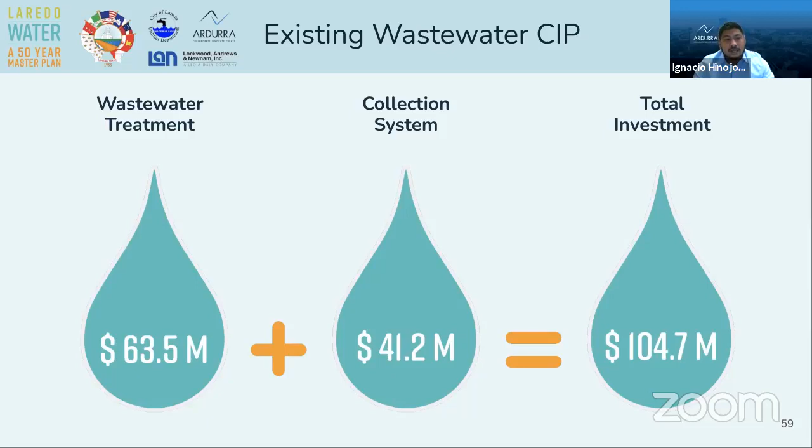So now the CIP plan is what the city has - it's what has been allocated for the next 4 years. And we're going to be taking a look at that and possibly modifying it as we go through this process, to ensure that the money is being invested where it's needed as the city grows.

And what is a CIP? I think Lisa touched on the CIP projects on the water side earlier in this presentation. But an example on the wastewater side - a couple of projects that were recently completed were the South Laredo wastewater treatment plant expansion, completed last year at a total cost of $21 million. And in 2019, the Unitec wastewater treatment plant improvements were completed, approximately $2 million.

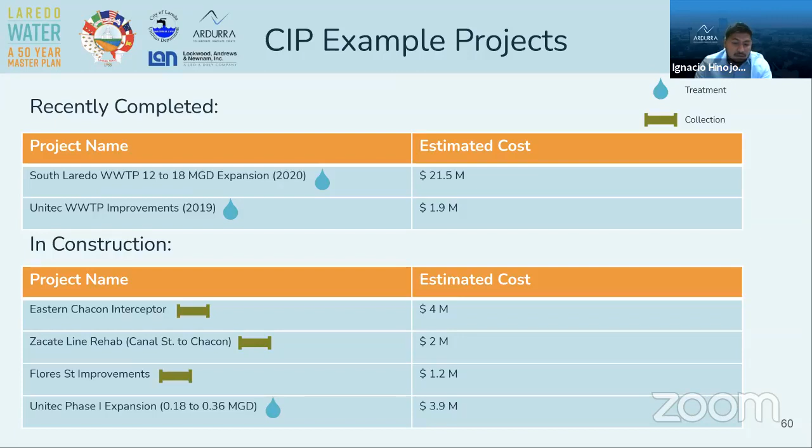Right now, under construction we have a few - the Eastern Chacon Interceptor on Jaime Zapata Memorial Highway, a big interceptor project at $4 million; the Zacate Line rehab from Canal Street down to Chacon Creek; the Flores Street improvements right there in front of RIA's office in front of City Hall; and the Unitec Phase 1 expansion, also ongoing on the treatment side, with an estimated cost of $4 million.

And with that, I completed going over what we're currently doing for the wastewater master plan. The next steps will be to take all the information we collected - the flow projections, the wastewater collection system analysis, the asset management - input them into the model, update the model, evaluate the alternatives we come up with, and then provide an integrated CIP and a master plan report for the city to use for the next 50 years.